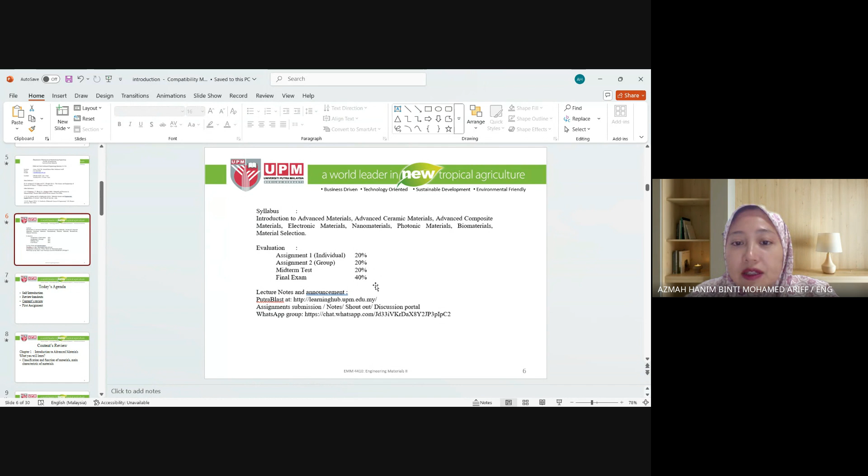This is our class registered under the code EMM4412 and EMM4416. I just wanted to remind you, those that maybe have not taken a look at the recorded session from last week, I'll recap the important items, which are the evaluation: Assignment 1, individual, 20%. Assignment 2, group, 20%. Midterm test, 20%. And final exam, 40%. As I mentioned last time, for the first assignment, it was given in that recording last week.

The due date - can you see the slide for the first assignment that I'm showing now? Is it... okay. I'm worried because sometimes it does not show.

For our first assignment, it is an individual assignment. The due date is on 18th of April 2025, Friday, 5 p.m. And I have created a portal for you to submit the assignment on PutraBlast.

There are 10 questions, and you're just assigned one question each. Based on the question assigned, you have to write a comprehensive maximum 15 pages - maximum, not minimum - report on the topic.

The file submitted must be in PDF. Of course, we are talking about technical reports, so all facts must be cited, and all figures and tables taken from other sources must be cited as well in their title, as per the method you are using for your thesis writing, FYP thesis writing. And of course, it must have a list of references in the end, and the references cited in the text - what does it mean?

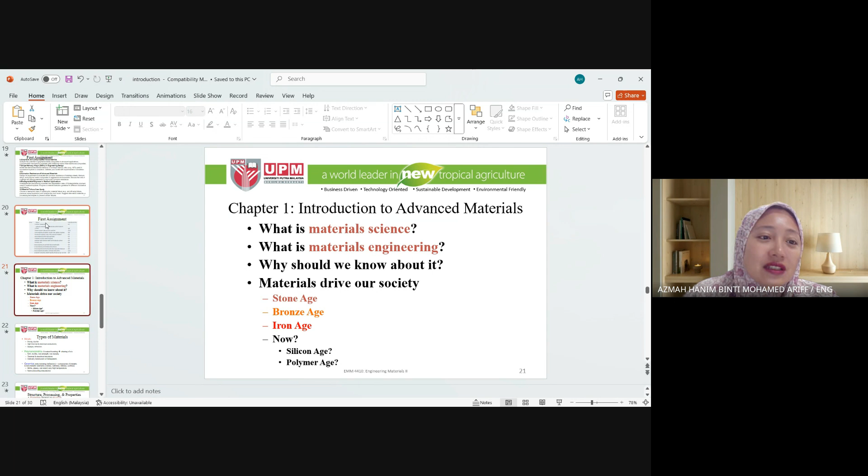There's a saying that the work actually expands according to the time you dedicate to it. So please try - although I've given you the due date of 18th of April - to do it even before Raya. You can actually just submit your assignment in the portal before then if you have the time. Do not wait until the last minute.

So now we are going into - oh sorry, before that, do you have any questions about the first assignment? Any questions? If not, then okay, I would assume there is no question. So let's move on to our subject for today.

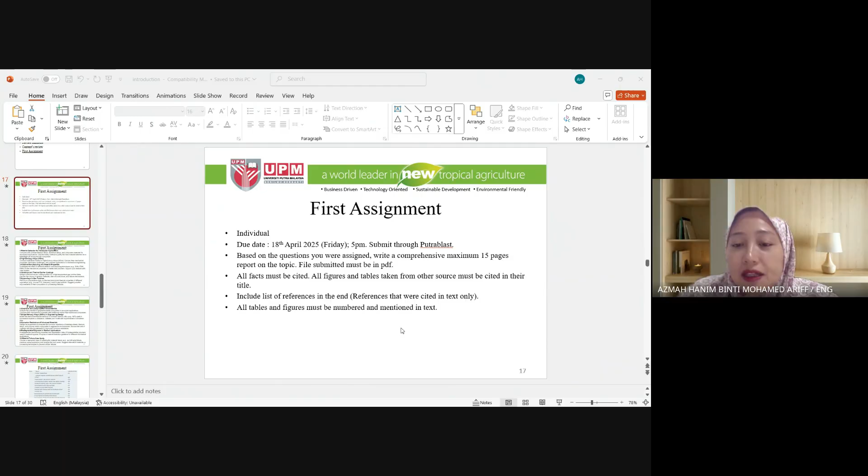Isn't something else... okay, so today we are going into the second chapter, whereby in the first chapter it is basically a simple introduction to what is advanced material engineering.

Now we are going into our first material, which is ceramic. As I mentioned before, in material engineering that you learned in your first year, first semester, most of the topics there cover metals, and maybe a little bit of ceramic and polymers, which is just one chapter on both ceramic and polymers. But the rest actually belongs to metals, because most of the structural equipment and everything is mostly made of metals.

In advanced engineering materials, this subject, we're trying to explore other types of materials that exist out there. Ceramic is one of the main materials that exists on the face of this earth. So you have metals, ceramic, polymers, and also composite, according to some studies. But maybe some other books just say metals, ceramic, and polymers, and composite actually belongs to the subset of the materials under each category.

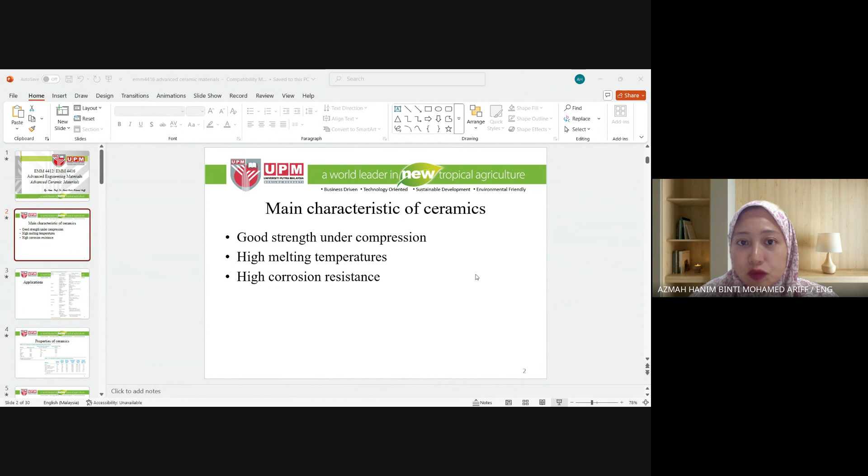So now you should be able to see the page on the main characteristics of ceramics. Let me make it full screen, then move to the applications. Did it change? Not really. Okay, let's try another way. I'll just share the whole screen. Okay, now I'm opening the ceramic slides, and full screen, moving to main characteristics of ceramics. Did it play? It changed now. Okay, good, thank you so much.

As I mentioned just now, the three main things you should remember about ceramics is that it is very good under compression. Not talking about its behavior under tensile or bending property, only compression. So it is the best material that will give the best performance under compression.

Another main characteristic of ceramic is that it has a very, very, very high melting temperature. Meaning that if you put ceramic in a situation where there is a fire, everything will melt except for ceramic. So it has a very high melting temperature, and we will go through the range of melting temperatures later. Of course it also has a melting temperature, but the value is very high.

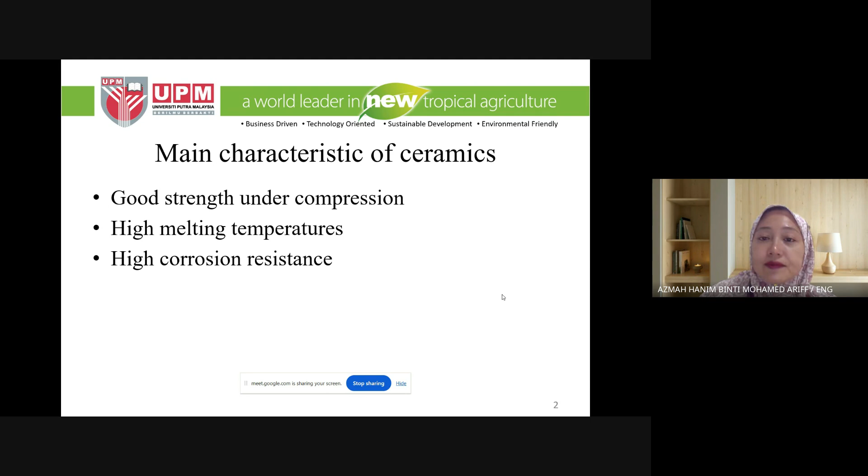So there are many applications of ceramics in this current world. Basically, ceramic started as a structural material, meaning when you want to build a house or any foundation of buildings, you need bricks, and brick is basically a ceramic category material. Then from construction, as the evolution of our knowledge continues, people started to find other applications for ceramics.

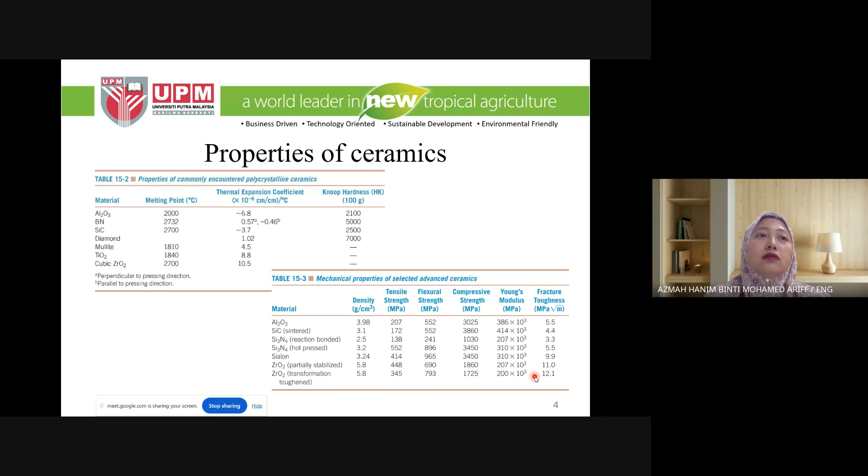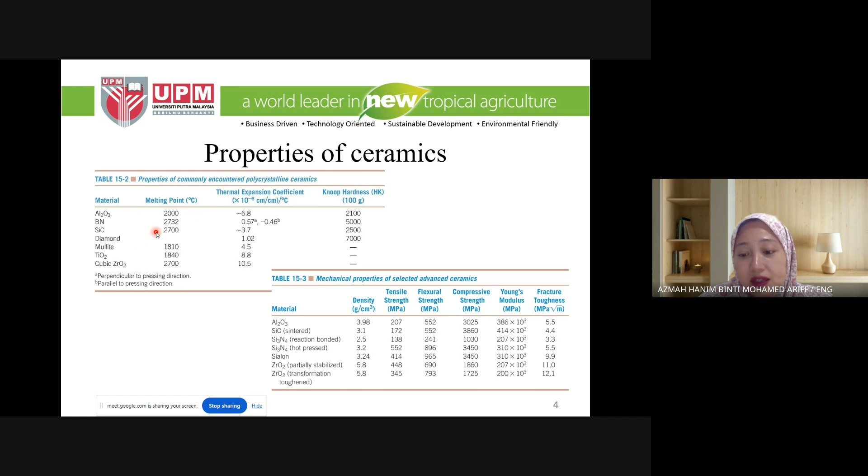Basically, if you take a metal and then you take a ceramic and test the brittleness, the ceramic will fail miserably because it is a very brittle material. But it has high wear resistance, high compressive strength, and a very high melting point. So we look at the good things only for ceramics.

So when we talk about ceramic material, usually in each material category there are many ways to classify it - to say this belongs to this group of material, that belongs to that group. For ceramic, one way to classify it is by application.

So we can have glasses as the first category, whereby glass is different from others in the sense that it is amorphous. We know that ceramic has ionic structure, as you learned in year one first semester. It's different in the way that it is ionic, but it is amorphous when it solidifies.

So that is why glass is glass - because once it solidifies, it stays in an amorphous state. And because it stays amorphous, there are no grain boundaries. So when there are no grain boundaries, the light will not be scattered at the grains and it will go through the material. Without scattering, it just goes through - that is why glass can be see-through. That gives the characteristic of glass.

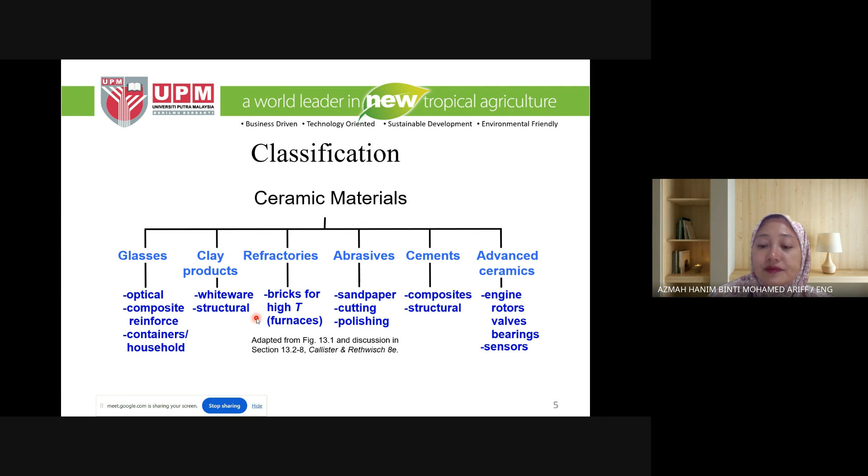For example, you can produce ceramic with piezoelectric properties, or ceramic with magnetic properties that is not natural, and then use that for certain applications that are suitable. Those kinds of things belong under advanced ceramics. So that is the classification of ceramic material based on the application.

And now we are going to take a look at the formation. So now that we know all the different types of ceramic material classification, the next question is, how are we going to produce a component from it? Because we know that ceramic is not like metals.

Metals you can cast, because they have an acceptable melting point, maybe around 600, 700 degrees Celsius. And you have ceramic that has a very high melting point that can be the container of that heat and hold the metal as it melts. Then after that you can pour it into, what is 'acuan' in English? A die. You pour it into a die, and that die will take a certain shape. As it solidifies, you take out the metal from the die, and then you can lathe it or do whatever processes you want with it to produce the final component.

But that is not workable with ceramic. For one, it has a very, very high melting point, let's say around 2,000 degrees Celsius. If you wanted to heat up the ceramic to 2,000 degrees Celsius, even the furnace will melt, because the furnace itself is also made of ceramic. So it is basically not possible to melt it.

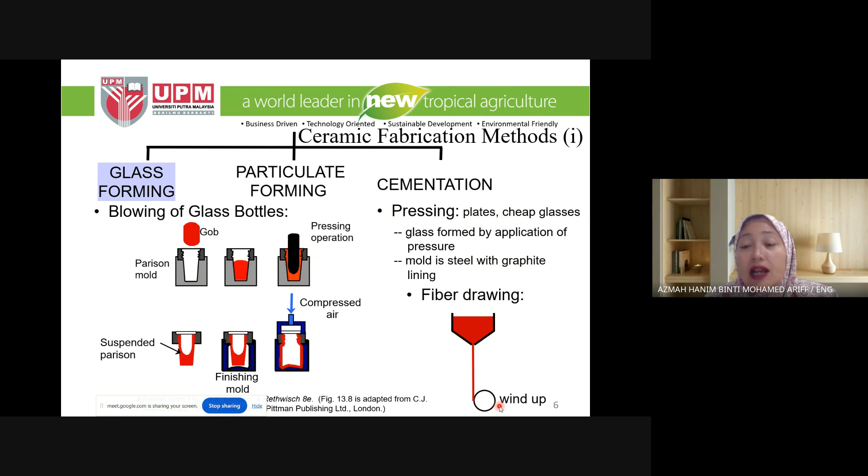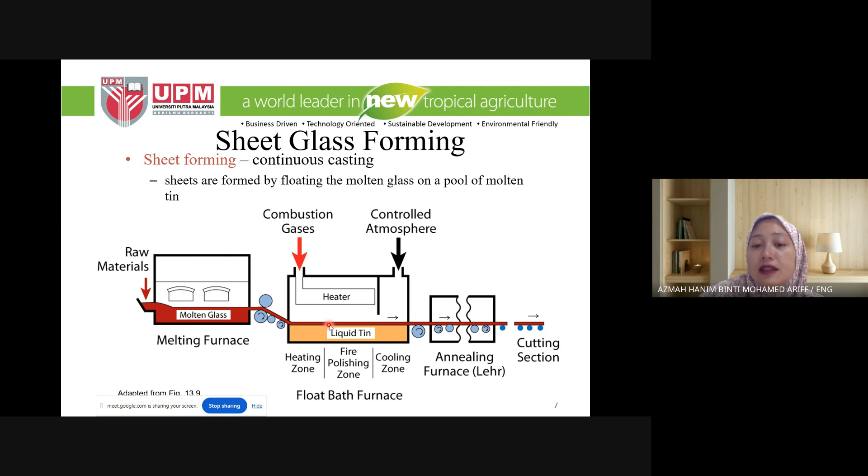Then we also have normal big glass, like for structures such as the front part of your car, or your vanity glass, which also goes through this process. In this process, you have molten glass, and with the effect of gravity it floats on the liquid tin, because you need to cover the other part with something - if you don't, it will be see-through. But if you want to use it as vanity glass forever, you can coat it with something else, or use this to suspend it.

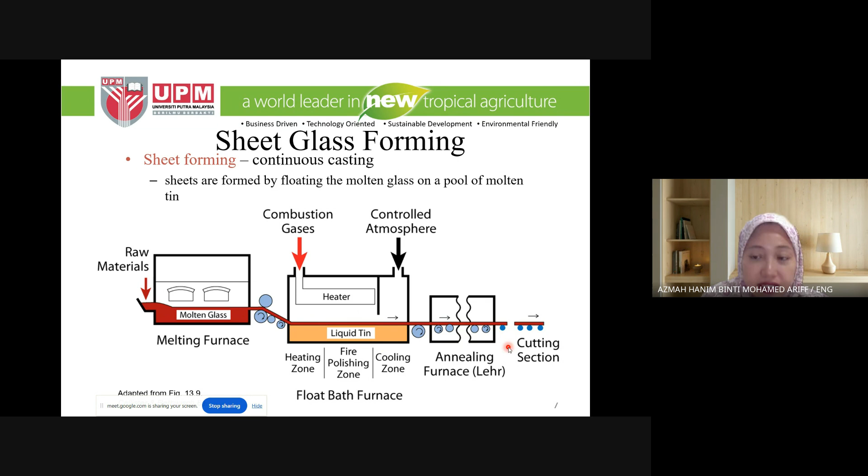Doesn't matter - we can go through grinding later on to remove whatever is required. So basically you float it on whatever solution you want, and then it goes through the annealing furnace to remove stress from the glass, because as glass solidifies it has some stress trapped inside. If the stress is too much, it becomes harder, but also more prone to brittle failure. That is why we have the annealing process afterwards, to remove stress from the component. Once stress is removed, you can cut it safely into whatever size you want.

Okay, so let's go to the bottom of the glass structure. Glass is usually made of silicon dioxide, basically silica. We know that ceramics usually have anion and cation - that is a must, meaning one element has positive attributes, another has negative attributes, and as the cation and anion merge, it becomes ceramic.

Glass is made of silicon dioxide, or the other name is quartz. Glass is most of the time non-crystalline, it is amorphous. But you can change glass into ceramic as you add in some other elements. Glass can also be made into crystalline, but you have to modify the process and add in other impurities to make sure it is prone to form grain boundaries.

So there are many types of glass. Basically, to produce glass, you can simply go to the side of the beach, take the sand that is made of silica, expose it to very high temperature, and it will become glass. That's why glass is very famous, because you can produce it from sand at the beach.

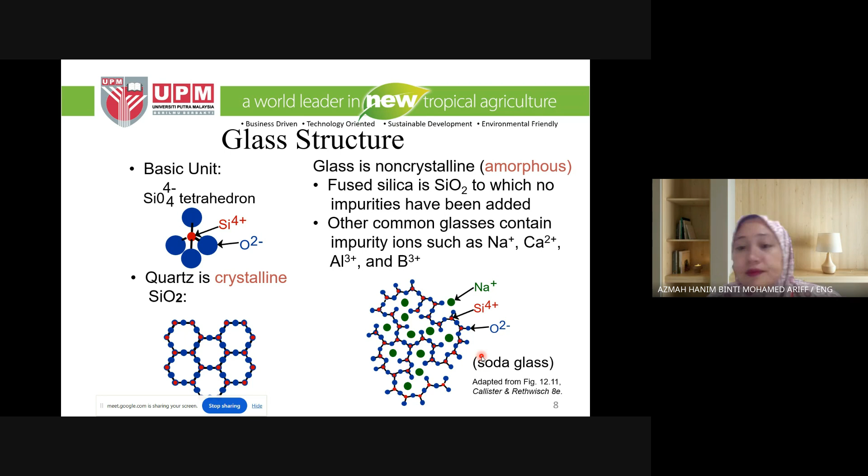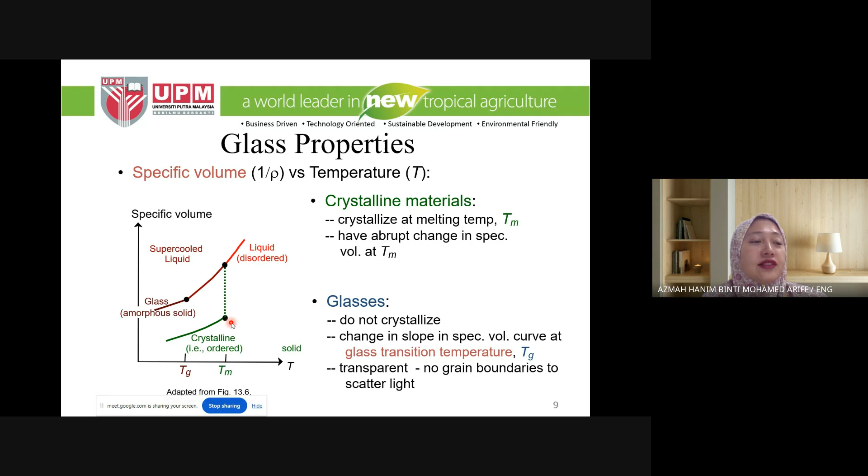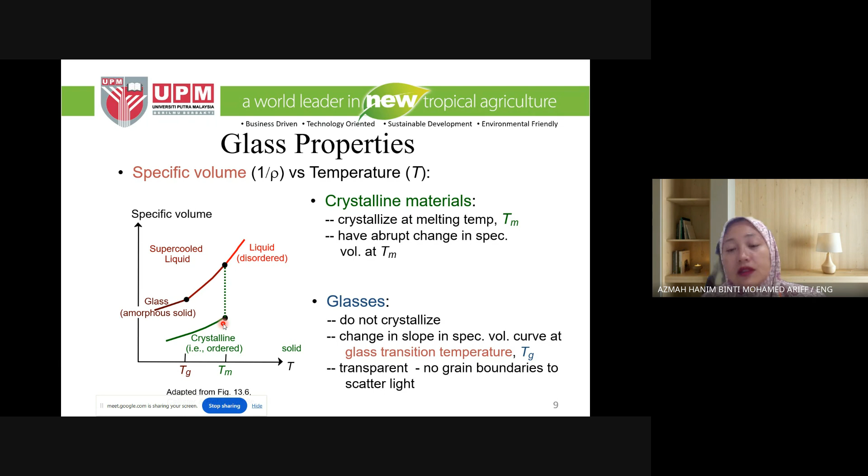So what does it mean? It also means there are some defects that can happen during this state, once it changes from liquid form into the crystalline form. So it does have an effect on the component later on, right? So that is the difference.

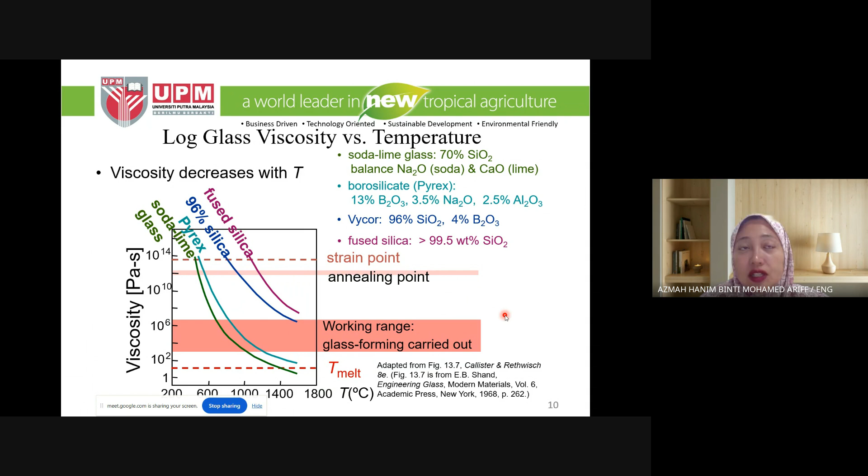So this is the change of viscosity with temperature, and it actually determines the processes that you will carry out to form the component.

Another thing we should know about glass is that there are basically heat treatments that you can do. As I mentioned, you can use annealing. What is the purpose of annealing? To remove the internal stress caused by uneven cooling. As you shape the glass, the outer part will cool down first compared to the inner part, and that gives some difference in terms of stress distribution, which might cause some defects later on. So annealing is used to remove the internal stress caused by this uneven cooling. You want to remove the stress.

And then there is another type of heat treatment where you purposely induce stress. Just now you wanted to remove the problem, but now you wanted to give a problem so that it can solve another problem - that is tempering. Tempering is done when you want to make sure that the outer part or surface of the glass is always in a state of compression. Why do you want it in compression? Because we know that glass is very brittle - just one scratch can have a very big catastrophic effect on ceramics.

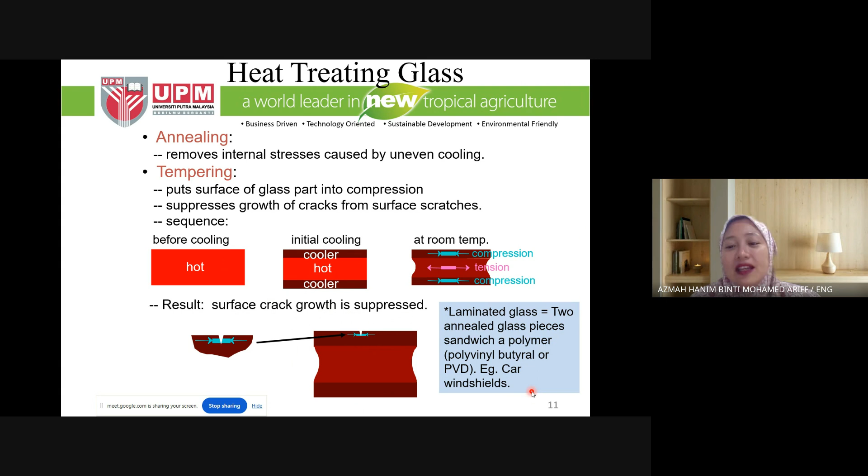Okay, and then of course nowadays for car windshields, for example, we have laminated glass, whereby you have two units of glass sandwiched with a layer of polymer to hold it together, so that once the glass breaks, it does not fly into your face. It will just stay there, not as one piece, but still in place. This is for safety reasons, right?

Now we go into the ceramic processes with powders. Of course, first, in order to use this method, you need to synthesize the ceramic first in powder form. So to do this, we use ball milling, blending, spray drying of powders using processing additives.

So spray drying is that you mix the slurry powder in the slurry with some solution and then you spray it. As it cools down in the air, it becomes fine powders. The same method that people use to produce milk powders.

Okay, the same method. And then once you have it in powder form, then you shape it into whatever shape that you want using whatever pressing technique, or slip casting, or tape casting, which we will go through later. And then you use this shape process to consolidate it into a dense monolithic object.

Then after you shape it, you want to make sure that this shape stays and it can be handled. So you use heat to consolidate it into a dense monolithic object using sintering or firing process. Expose it to heat, and then after that, it is hardened.

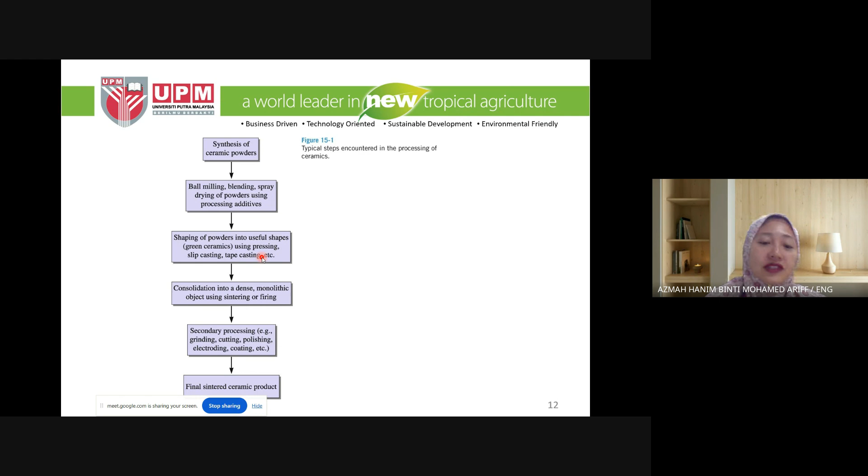Now you take that component and it can go through secondary processing. But the secondary processing for ceramic is not similar to the secondary processing of metals or polymers. The secondary process can only be a very surface-level, mild process.

You cannot then say, I wanted to cut this square into a triangle. Now you are just making a big problem for yourself. Or I wanted to cut this square into a star-shaped component. That is an even bigger problem if you're trying to do that.

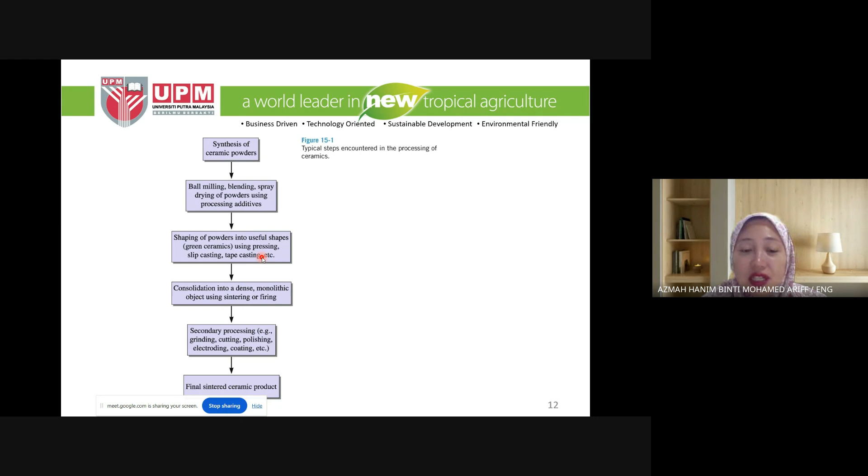Okay, the only thing that you can do is, this is a square component, but I wanted to just trim off the edges to make it a little bit more filleted. That is possible. So you can only use a secondary process that is very minor, like some grinding, very minor cutting, polishing, or you wanted to coat it with something. Then it is possible as a secondary process for a ceramic component. And then after that, you have the final ceramic product.

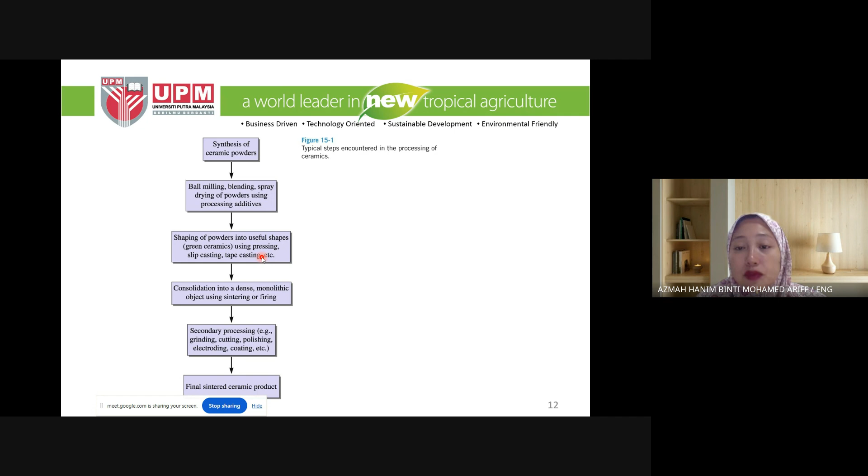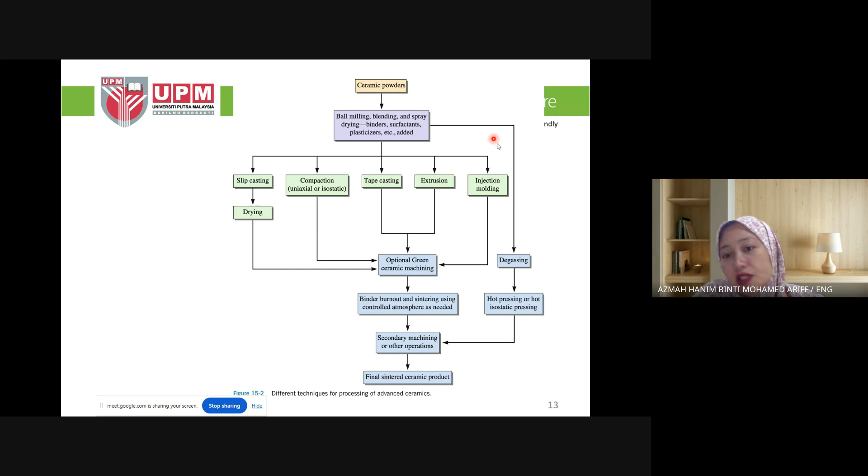Okay, so when we talk about powders, it can go through all of these methods: slip casting, compaction, tape casting, extrusion, or injection molding. And we are going to go through that detail now. So it falls under particulate forming when the ceramic is in powder form.

For example, now you already have these ceramic powders that you have obtained through a grinding or milling process. Then you screen it into whatever particle size that you want, because different particle sizes will give you different properties as well. Not only different elements, there are a lot of things in ceramic that influence the properties.

Then after you have screened it into the desired particle size that you want to process, you can mix it with a plasticizer, or mix it with any other binder, just to bind and hold the particles together. Usually at this stage, it will be like plasticine. And then you can play with it like Play-Doh, using the extrusion process to produce whatever shape that you want, and then you can cut it to whatever size.

Then you can extrude it into round, not hollow, round rod or square shape, whatever makes sense, like plasticine, exactly like Play-Doh. After that, you cut it, and then you put it into a furnace to dry it, and increase the temperature. Some call it firing, so that it hardens into the shape that you want.

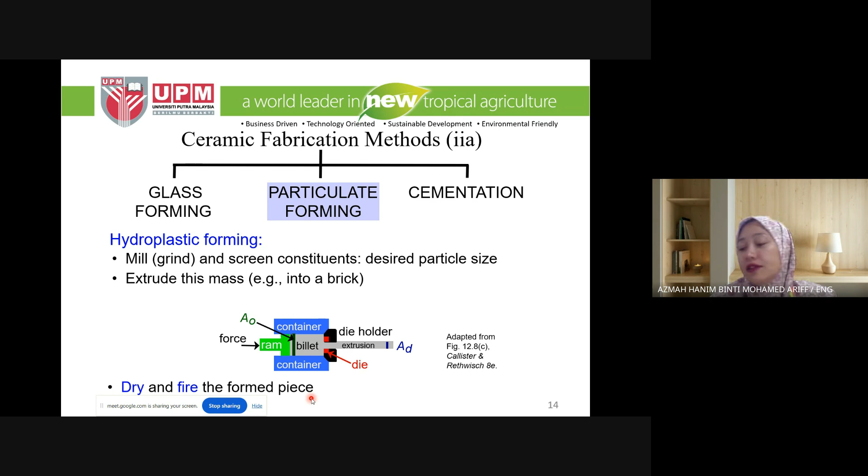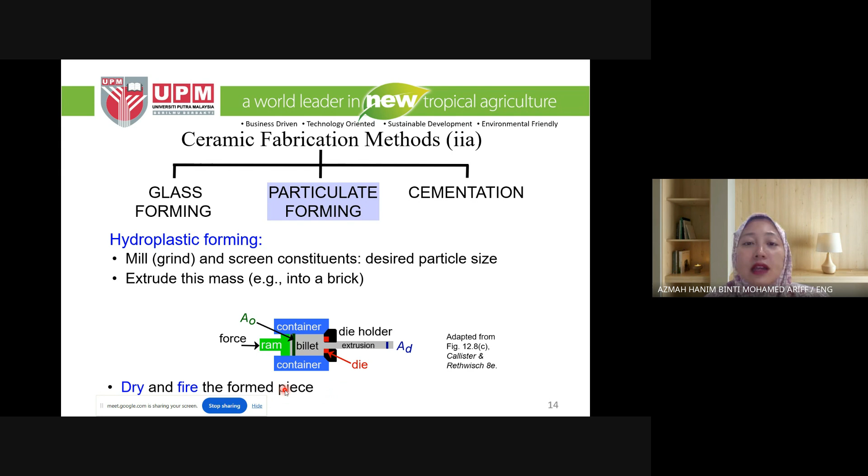So in the hydroplastic forming process, you have to take note of the amount of this binding agent that you put in. You don't want to put in too much binding agent, because then the shrinkage would be too much. But you cannot put too little binding agent, because then it will break during the extrusion process. It has to be a balance, so that the size definitely will change, but hopefully not much. That is also something you have to take into account when you want to produce a ceramic component.

So this is another method for particulate forming. Again, you have the powders, you screen it into whatever particle size that you want, then you mix it with the binder. In this particular solution, most of the time we use water for this state of binder. There are many types of binder. For slip casting, usually we use water, and of course we mix in other binders as well.

You should know that for this method, it is now not like plasticine. It is more like a slurry. Porridge, maybe, a very viscous porridge. Quite a viscous porridge, yeah. Like watery. Okay, so what happens is that in this particular method, now you should have a die.

Then you pour in, as I mentioned, pour meaning that it is very viscous, you pour in the solution. If you let it dry, meaning that the die will absorb all the binders out and leave you with that shape that you want, that consists mostly of the ceramic powders.

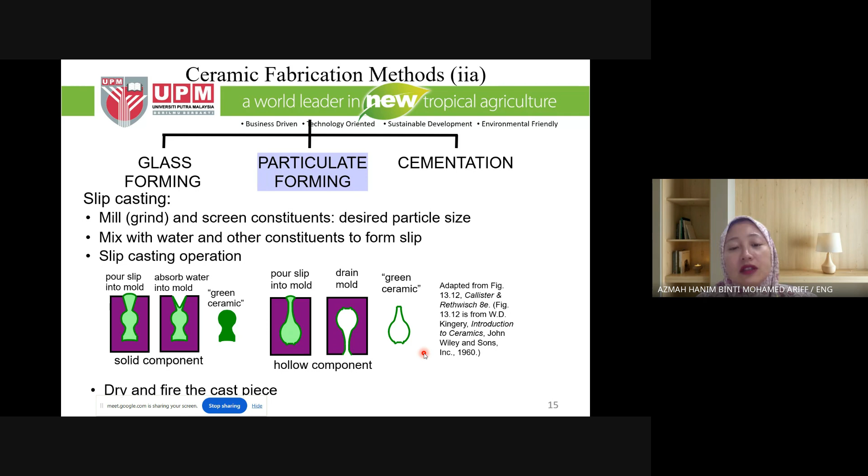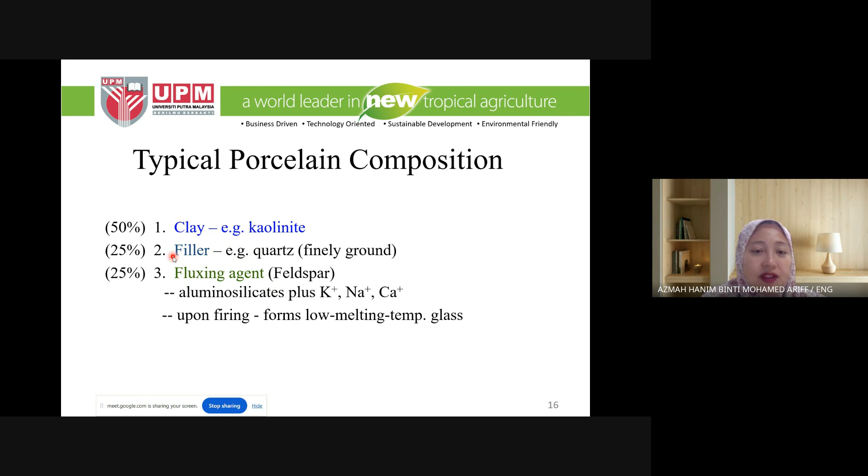So what gives clay its properties? What differentiates clay from tanah gambut, the soil you use to plant trees? Can I take that soil and just produce pottery from it? I cannot, because clay is different. If you zoom in to look at the structure, clay is basically like layered pieces of particles that, when mixed with water, move around, which gives it the properties that make it possible to use to produce these products.

That is why clay soil, which is also made of soil, differs from tanah gambut or tanah laterite, the different types of soil you learn about maybe in high school.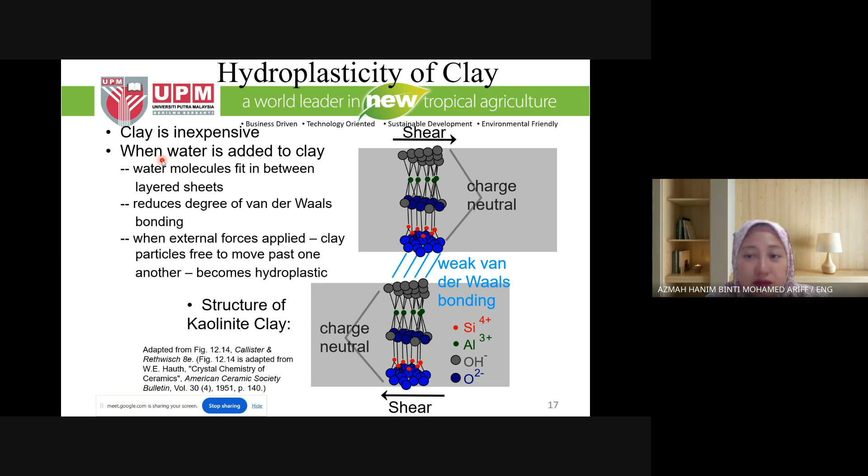Each soil has its own different properties. One is suitable to plant trees, one is suitable to use as a pottery product. Clay is used as a pottery product, and this happens because of the layer properties of the clay. When you put in water, the clay particles can move and slide all over each other, becoming a hydroplastic material.

Then this clay, you mix it with feldspar, and with a filler, the quartz. Once you mix it with water, you shape it into whatever shape you want. You can just Google any pottery lesson and see how they shape it into whatever shape they want.

So for drying, you can do this at a lower temperature - anything lower than this can be categorized as drying. During the drying stage, it is still soft, meaning I can make a shape or indentation, or just stick it together as I want. It will change according to whatever pressure I put in. Then firing's purpose is to hold things together.

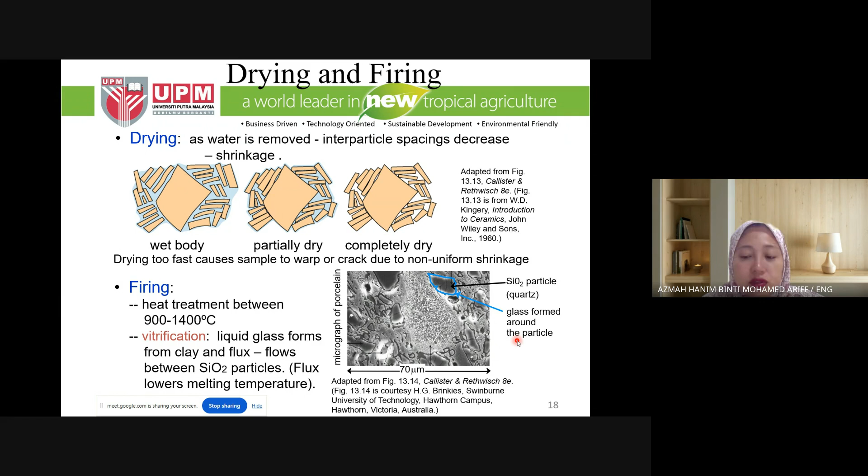Only the clay and the fluxing agent change into semi-liquid form and flow through to hold things together, and some parts become like a glassy stage. So that is porcelain formation.

Now we go into powder metallurgy, which also falls under the category of particulate forming. We can use this for both clay and non-clay compositions.

What happens is you have a powder, you put in a little bit of binder - you don't want it to be very dry, you also don't want it to be very wet. The binder is just enough to hold everything in place, not similar to the porcelain method just now. So this is powder metallurgy.

You put the binder plus the powder together, so that it's actually not even to the state where it's like Play-Doh - it's less than that. The powder is still in powder form, but with the binder, the powder sticks to each other. Then you throw everything inside a mold, and there are many ways to apply pressure to shape it using the pressure method.

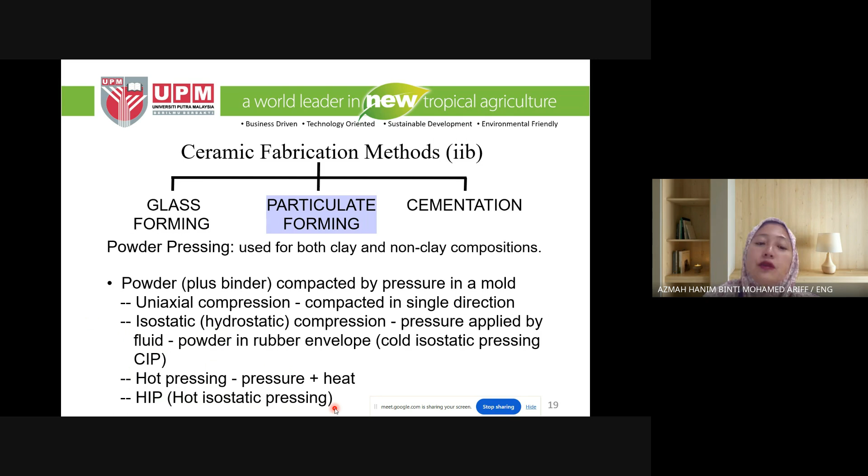But again, once you take out from the die, you still have to go through the firing stage. But at least now it is easier to be handled because it is harder compared to the green product. But most of the time in the industry, we do not use the hot isostatic pressing and the hot pressing plus heat because it is too much for the machine itself, and it also costly. So most of the time they use uniaxial compression or isostatic compression.

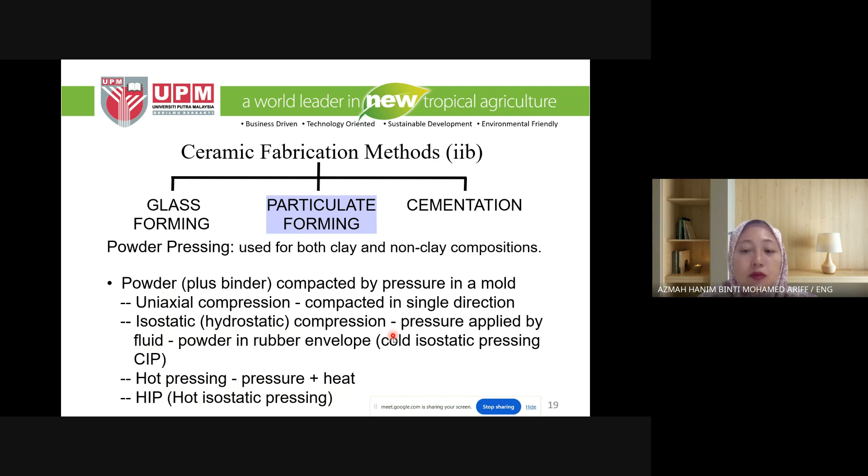So the one thing that differentiates between ceramics and metals and polymers is the ability of the ceramic to form pores. There are higher possibility for ceramic to form pores because of this process of the firing or sintering process.

So previously, pores is something that you cannot run away from with this kind of method to produce components using powders, because there is no way for you to melt it as the temperature is too much. But you can expose it to a temperature that is high enough for the necking process to happen and the powders to consolidate with each other.

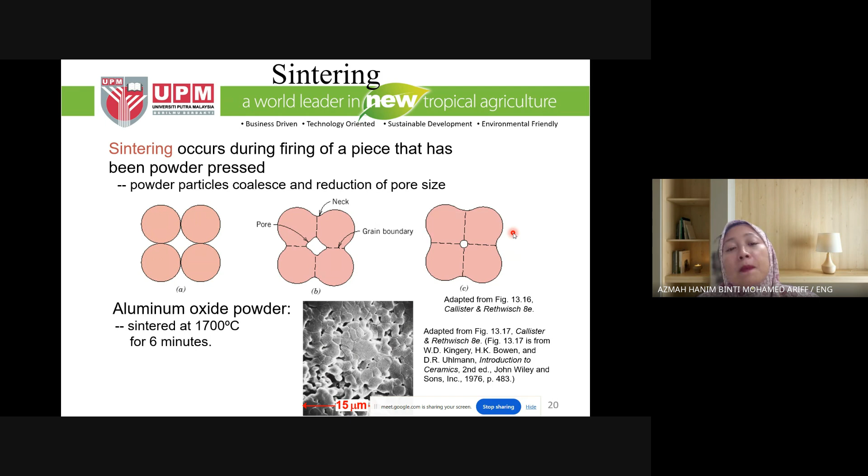Previously, people treat pores as something bad, but now there are also some applications where we wanted it to have pores, because we wanted to use it to screen out something, for example. All right, so we want it to have some pores.

So this is another method to produce components from ceramic using powders.

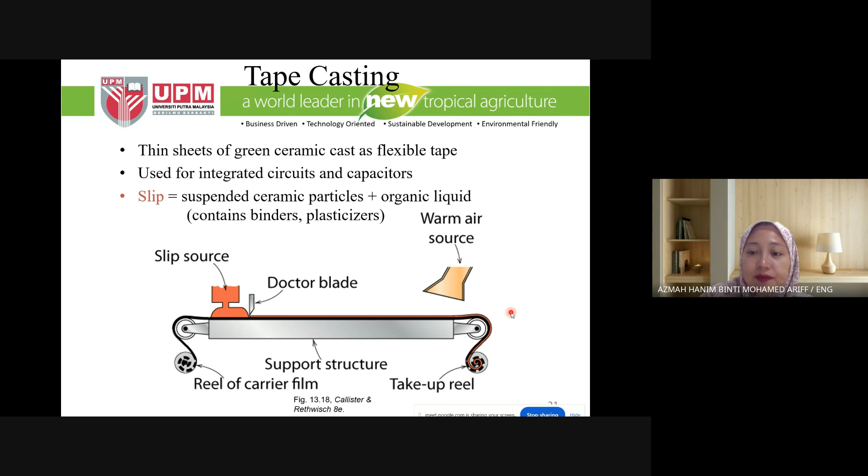Okay, so we have gone through glass forming, we have gone through particulate forming. We now go to the last stage, which is cementation. As I mentioned, cementation is different to glass and particulate forming, because glass and particulate, you form it into the shape because you combine it with some binder, or you heat it up. In the sense of glass, you heat it up, it changes in terms of viscosity, and then as it cools down, it becomes a certain shape that you want. For particulate, powder plus binder, and then you shape it into the shape that you want, you dry it off, then you sinter it or you heat it up, then you have the component that you want. Both of these processes involve heat.

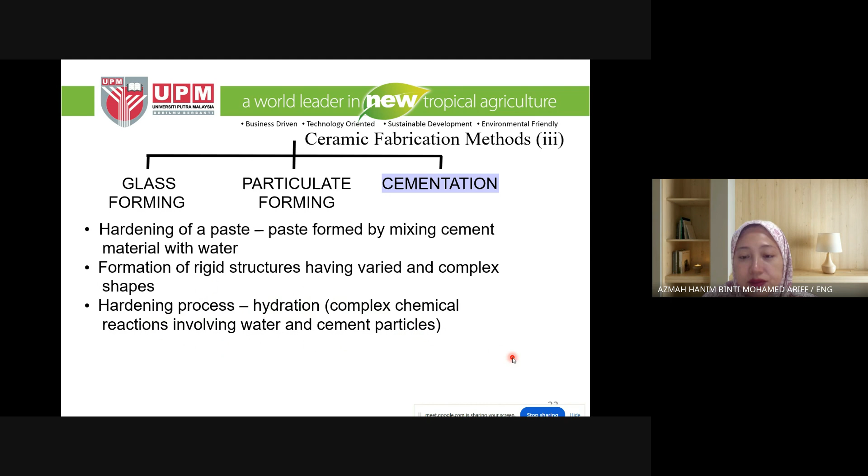But for cementation, you have the powders, you have the chemical plus that you put in water. Then it reacts chemically and then it hardens up. So that differentiates the cementation fabrication method. Usually the chemical reaction takes place when you mix it with water, and using this cementation process, you can form big rigid structures also with complex shapes. The hardening process depends on the hydration, which is the complex chemical reaction involving water and cement particles. So that is cementation, very simple. You mix it with water and it chemically reacts, heats up, evaporates all the water, becomes hardened. Okay, so that is cement.

So now this is showing that, for example, you have one type of material, which is silicon nitride, and then you proceed to process it using different techniques. One using slip casting technique, one using reaction bonding technique, one using hot pressing technique to produce the same dimension component. The compressive strength and the flexural strength will still differ because the rate or the amount of binder that you put in will be different. The rate of drying would be different. The rate of sintering would be different, or the firing would be different.

And then here you apply pressure. Here you use gravity, a lot of binder, so weaker. So all of those things influence the property of the final product. Meaning that if we wanted to produce a component made of ceramic, there are many, many things that we need to study to make sure that we produce a component with the strength that is required. This is just to show that same material, different technique, very big difference in terms of its property.

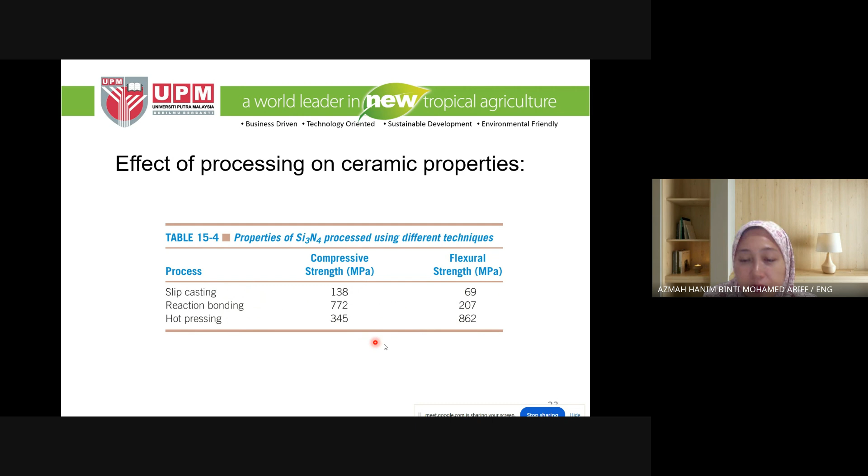Okay, just now I mentioned that porosity is also something that you cannot run away from when you produce ceramic, especially using the powder method, the one that involves powder. And even for the cementation process, if you peer right to the cement slab itself, sometimes you'll see porosity. Since it is something that you cannot run away from, you need to learn how to reduce it or how to increase it through the different process parameters, and you also need to analyze it.

So pores, it can be interconnected or it can be closed pores. What does it mean by interconnected pores? It means that, let's say I have a slab of material in front of me and it has pores. Interconnected pores means that if, let's say, I pour water on the top here, then it can actually emerge out from the bottom side because the pores are connected to each other. So the water can flow from top to bottom. That is what is meant by interconnected pores.

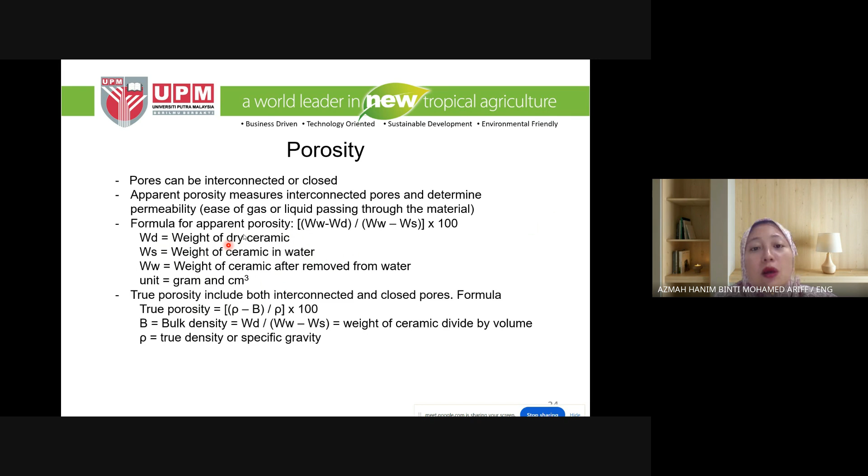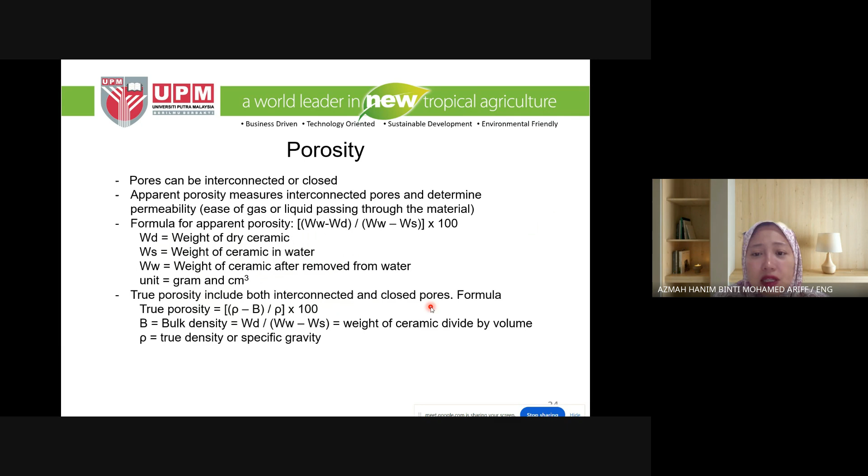I think here I only show the porosity formula for apparent porosity and true porosity. Apparent porosity is simply an estimation of the pores it should have, but the true porosity is the actual pores that it has, interconnected and closed pores.

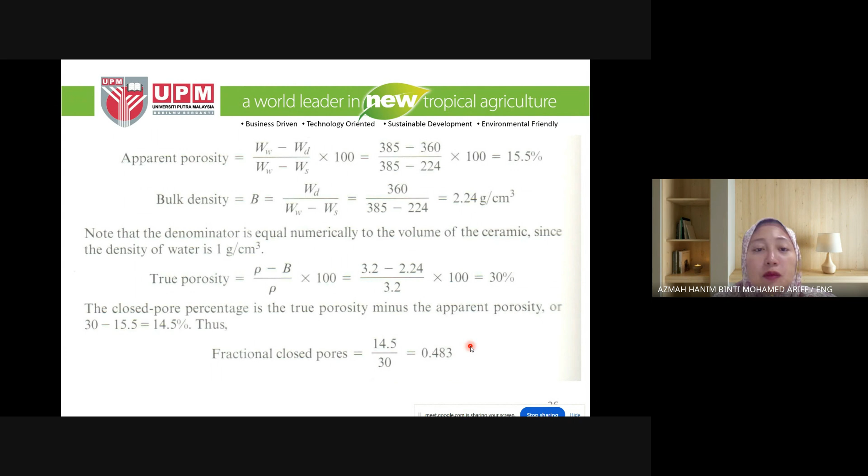Once you have this calculation - apparent porosity, bulk density, true porosity - then you can use it. I didn't show, unfortunately, in the first slide how to calculate the percentage of closed pores from these values. But you can take a look at this example here, which shows how to use the equation. If you have any problem with this example, you can let me know later.

So next, that is the basic theory of what you should know about ceramics. Now you have known everything important that you should know about ceramics. Okay, so now we'll have activities.

Since we are online and not in class, we cannot have this real time. But I hope you can use the time we have left, another 30 minutes after this, or the class hours tomorrow, to complete this first activity and the second activity.

For the first activity, we will learn about ceramic powder synthesis. This will be group work, whereby, since there are only 15 of you in this class, you basically know each other, and you can communicate with your friends offline.

So you choose your own group members. But in the sad situation where you cannot find group members, I allow a group of one person for this activity, seeing that we are in the online situation. It's good if you have a member so you won't be alone.

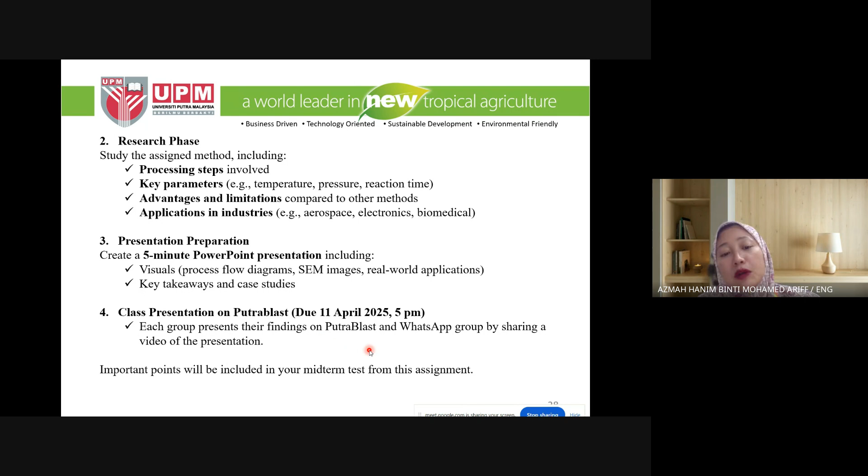Share the video on PutraBlast to submit your assignment, and in our WhatsApp group so others can see. The due date is 11th of April 2025, 5 p.m. That is the first activity.

That is a group activity. Next, we have an individual activity. So now we move from the method to the industry. It is like a virtual company visit and report. You can choose one company.

Again, first come, first serve. So if student number one says he or she wants Kyocera, the next one has to choose another company. Once all four are complete, the fifth one can choose Kyocera again.

When you visit the company website, YouTube videos, or research papers, I want you to focus only on the type of advanced ceramics produced, the manufacturing techniques used, the industries it served, and the innovation and latest research. Does that mean you have to look at everything to come up with this? No. Maybe just take a look at one YouTube video or one page of the company website, because I just need you to write a 1 to 2 page report.